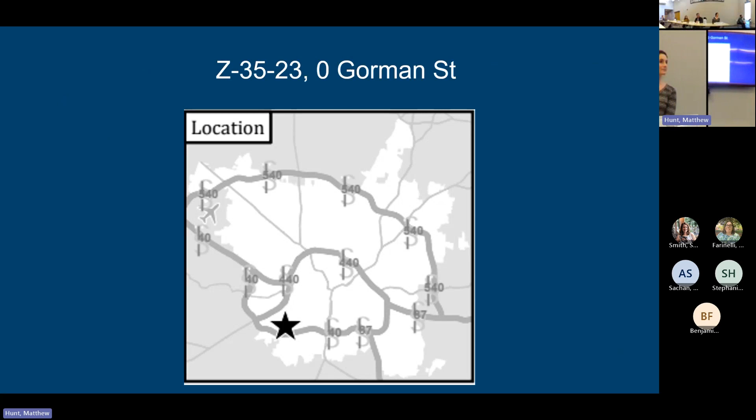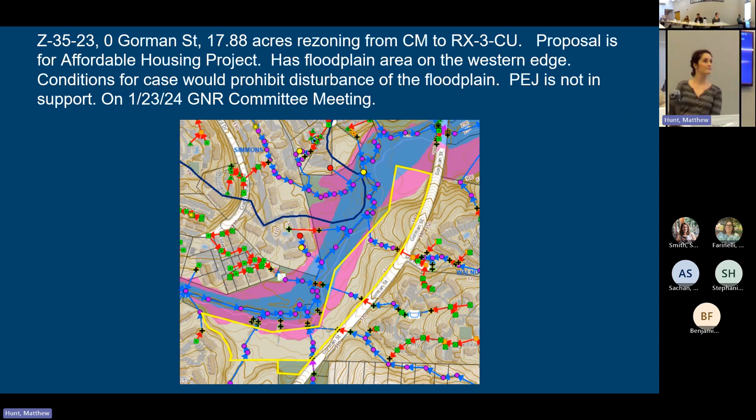But just as a reminder, the Gorman Street one is this rezoning here on Gorman Street, sort of behind that Food Lion Shopping Center, South of Avent Ferry Road. And they are on track for it to be discussed at the January 23rd Growth and Natural Resources Council Committee meeting. And if you recall from the December meeting, they have put conditions down to stay out of the floodplain, but there's still concerns about putting housing this close to the floodplain. And PEJ, the Partners for Environmental Justice, have come out against it, but I don't know if that has changed, if there's been discussions with them and the applicant. So that's the same schedule as we had in December.

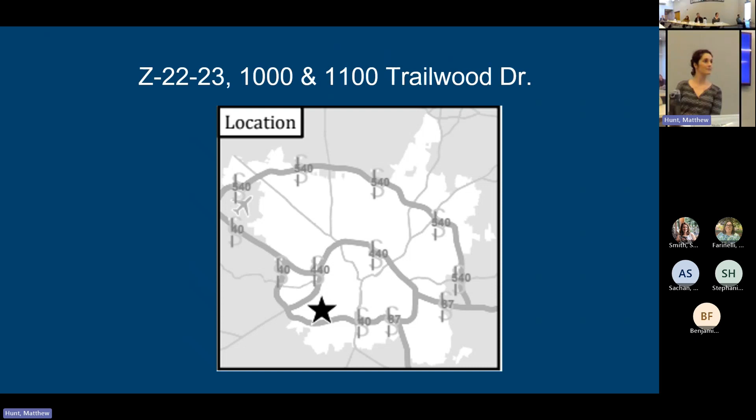The second one at the council table was at 1000 and 1100 Trailwood Drive, which is pretty much a couple blocks away from that one we just talked about, up Avent Ferry Road to the north there, and Trailwood is going north-south. This is the one where they were staying out of the majority of the floodplain, and they were going to go through the code allowances to disturb the floodplain with no impact to the flood levels in Walnut Creek. That's kind of their goal, and they've been discussing with Councilor Harrison a lot this past few days, as Wayne and I have been copied on emails for that.

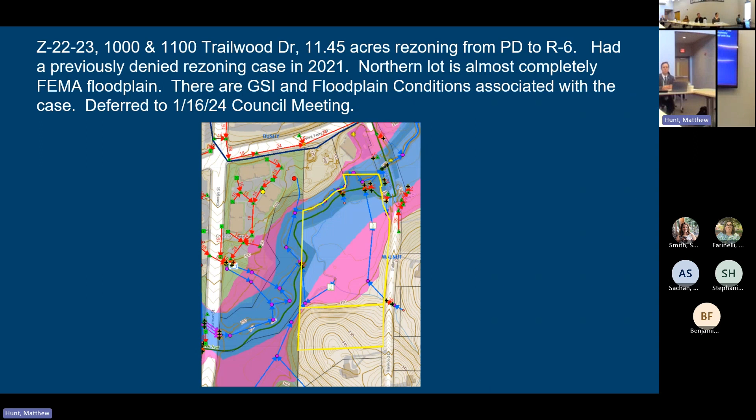As far as conditions, they do have a GSI condition as well for this site, and that'll actually be discussed at the January 16th council meeting, which was the same schedule we had in December. So that's not going to a committee meeting, but going to a council meeting in less than 2 weeks.

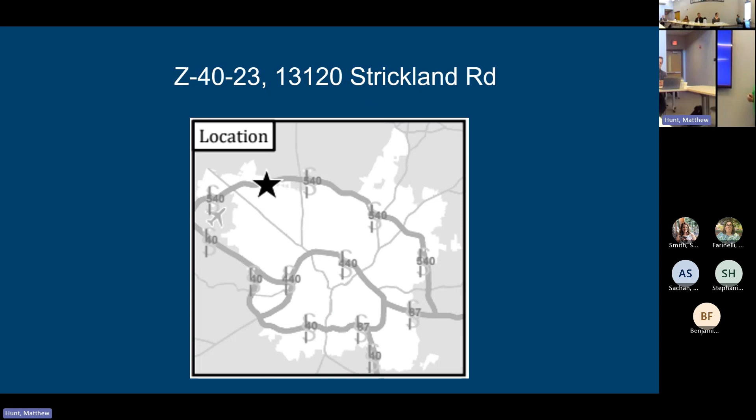And then the only schedule change was the one for Falls Lake that was on Strickland Road. This was the area behind the shopping center off of Strickland and Leesville Road. This went to Planning Commission in December after the SMAC meeting, but it immediately got referred to the Planning Commission Committee of the Whole, which usually meets on the fourth Thursday of every month. And I took that language off our website because they have not set the exact meeting time as of yet. So that should be on that January fourth Thursday agenda of the Planning Commission Committee of the Whole.

That's really a scheduling update there. So the Planning Commission didn't even discuss it at their December meeting. They just automatically referred it. So I assume there'll be robust discussion.

Any questions? I remember in December you made some comments because you were very familiar with this project. Do you have any follow-up? I know you're saying there's some erosion, I think, on the southern end.

I haven't been out there again since my initial site visit with some of the locals in the neighborhood who were concerned. I was out there with Councilwoman Harrison as well, and we did know there was a lot of really visible scouring and erosion that looked like it's coming off of the next door shopping mart. So we noted there are already some stormwater considerations on site, and we're thinking about cumulative impacts for adding more impervious surface there.

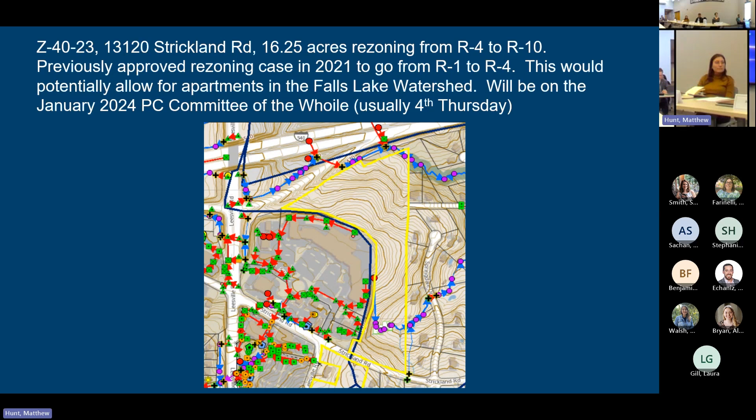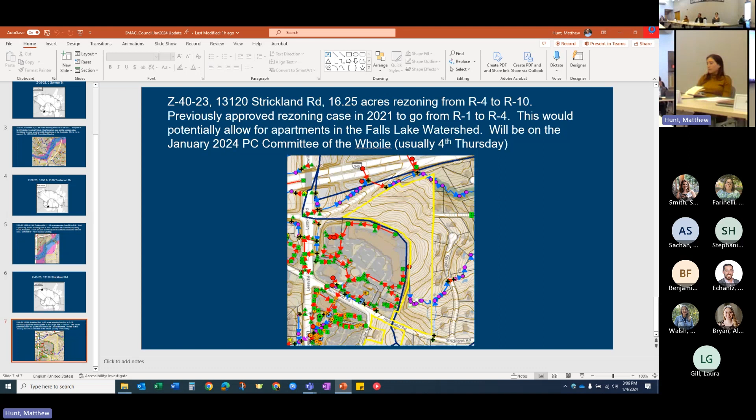I do have a couple of staff report updates on folks who have joined the stormwater team recently. First, I'd like to introduce Tonka Wilkins, who is here today as our new administrative support supervisor in the business services unit. Tonka comes to us from Raleigh Water Public Utilities.

She brings over 15 years of customer service and significant supervisory experience. In Raleigh Water, Tonka worked as the customer service supervisor, managing the customer service unit and providing essential customer service. In her new role with Raleigh Stormwater, she will supervise the administrative support team, oversee administrative support operations, and provide administrative support to the division and to SMAC as well. So welcome.

Also here today, another new member of the Stormwater team, Ross Keith, has joined the plan review team as a senior engineer. Ross has a master's degree in environmental physics and started his career as a stormwater operations manager, in charge of designing, operating, and managing all aspects related to the movement of stormwater for a special taxing district in South Florida. They really have some stormwater issues in South Florida, I know.

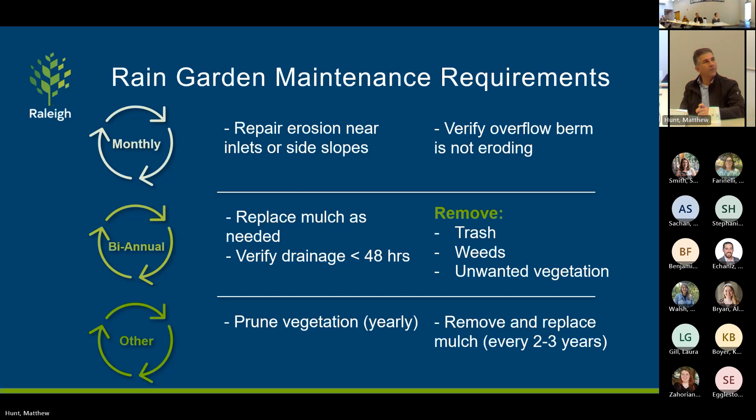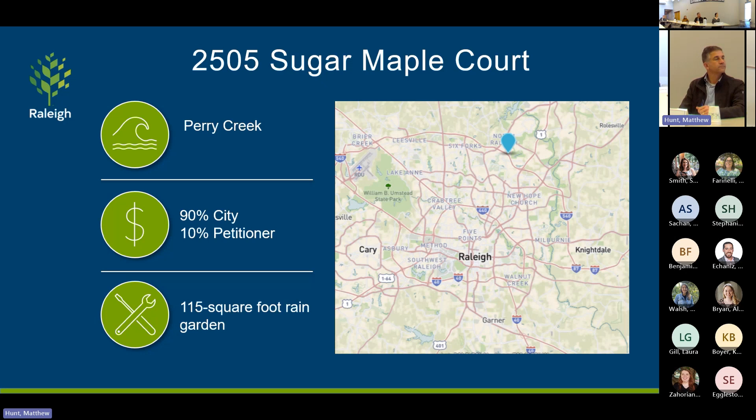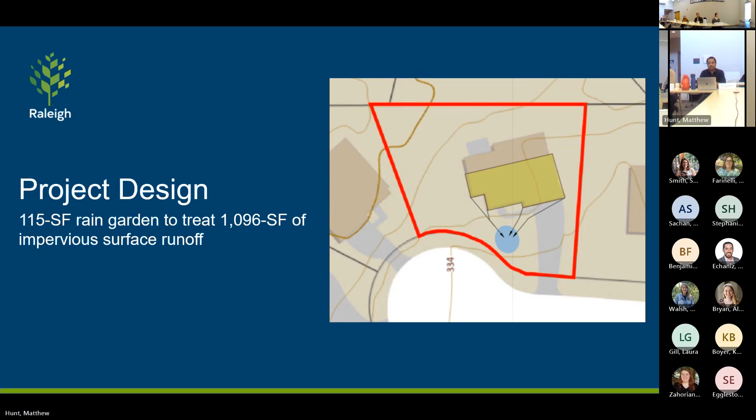First one is 2505 Sugar Maple Court, located in Perry Creek, and it's 90% eligible for reimbursement. It's a 115 square foot rain garden. Basic project design is it captures the front portion of their house, treating approximately 1,096 square feet of impervious surface. Here's a general location of where it's going to be located. They also agreed to put up a sign to emphasize this program. The two photos to the left show where the downspout is going, and the bottom left shows a former pathway of their drainage going right into our right of way. They put up some cinder block to dissipate that. So instead of the erosion and scouring problem happening at their property, it's going to go to a rain garden, which I think will help both their goals and our goals.

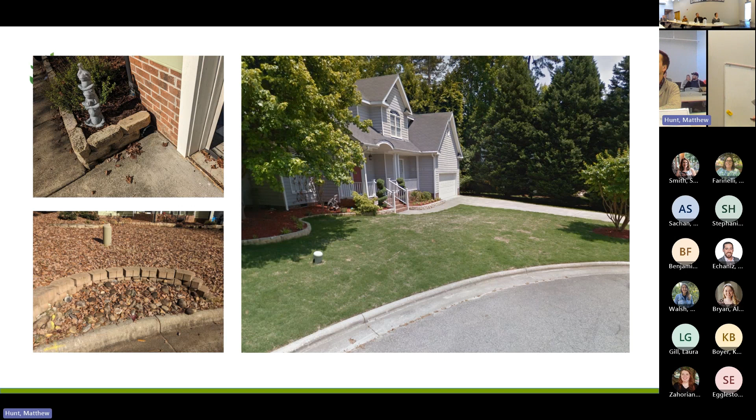Any questions with Sugar Maple Court? Any questions, we'll do these individually. Yeah, no problem. Yes, just to read it right there.

Currently dumping into the right of way, they had some various problems. They're going to do a rain garden on their property, fully within their property. In an extreme storm condition, it's going to improve the day-to-day work. These rain gardens are designed for 1 inch of rain, that's their design scale. So anything past 1 inch of rain, if designed perfectly, will overtop or overspill into the right of ways.

I did the math kind of quickly with these, I know 66K left, it's around 30K. That's correct, and that's a great point. With this program, with the main CIP budget, not the ARPA 100% eligibility, we're looking around $66,000. And after this, if all are approved, we're looking around 33,000 roughly. But we do have the option to take up to 50K, I believe it is, through an administrative action to cover costs in the interim until July, when that new budget will take effect.

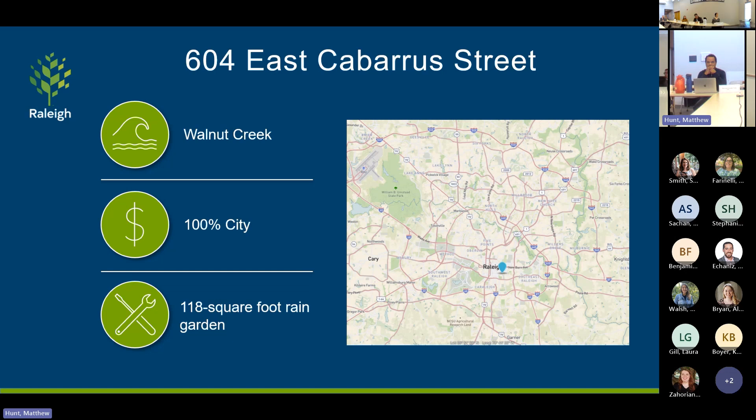All right, next one is 604 East Cabarrus Street, in Walnut Creek. This is the 100% eligibility project. Another small rain garden at 118 square feet. It's actually 2 rain gardens, one located in the back and one in the front. As you can see in the design, one's kind of a linear feature along their driveway, and one is in the top left of their property in the back of the house, but for a total of 118 square feet.

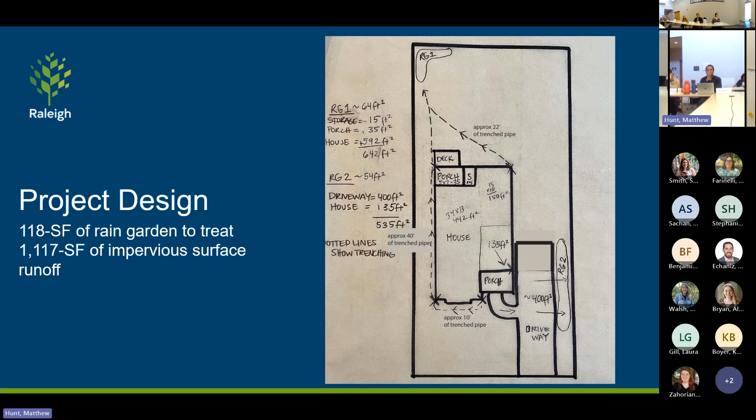These projects basically show the locations of the rain garden. The one on the left is in the top left. This is kind of a sideways photo, I apologize, but it's a photo of where the linear type feature will occur. We did speak to them about having an additional defined berm to stop any sort of flow from the neighbor's driveway.

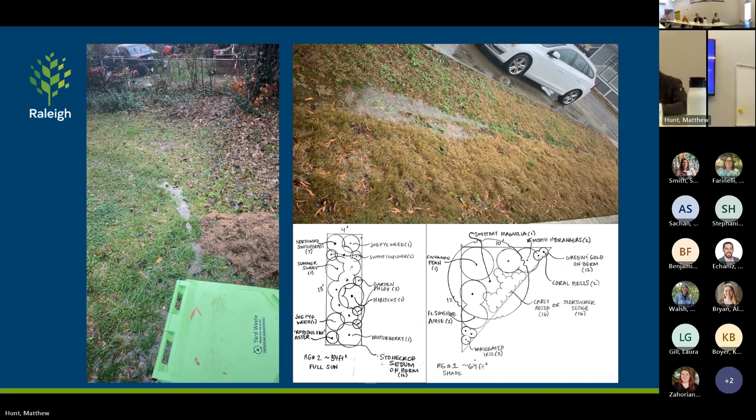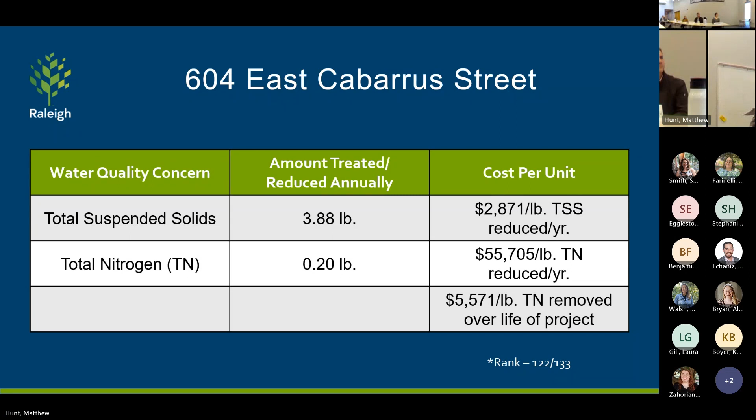Any questions with East Cabarrus Street? No, it complicates things a lot, but having the berm in between the driveway—is there any consideration of maybe them joining forces? Yeah, we often explore that or at least communicate that with property owners. It is complicated because of the legal agreement, and to be honest, I tend to lean away from it when talking with homeowners.

Justin might be able to speak to it. I know there's been a few instances of projects where two property owners have gone in with the same legal agreement. We have the method to do that, but it's not typical, and like I said, we tend to stay away from it just because of these recurring maintenance requirements and tracking people down—it's already complicated enough.

Any other questions? Motion to approve. Luann, there's a second. Josh, all in favor? Very good, all right, appreciate it.

Next up is 1000 Ravenwood Drive, located in the Simmons Branch, kind of the west end of town. This is the 75% zone. This is a 200 square foot rain garden.

Project design, once again, 200 square feet to treat roughly 2,072 square feet of rooftop. This project was another good example of renegotiating because their original design was sloped downhill. You can see the contour lines, and we asked them to try to identify or place this rain garden more on the flatter portion of their front yard.

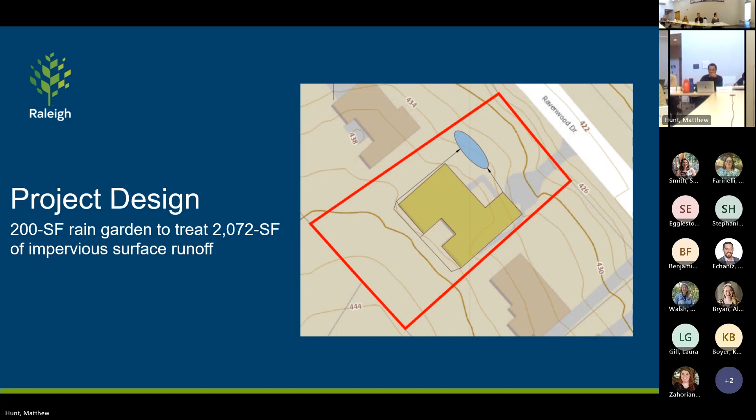As you can see, this is roughly where the location of the rain garden will be. It will be more on this flat end right there versus trying to build up the back end or downslope end as their original design had.

But great feature, once again, very public. And all of these designs agreed to put our signage in. So it's a good promotional, this whole round of projects are good promotional rain gardens.

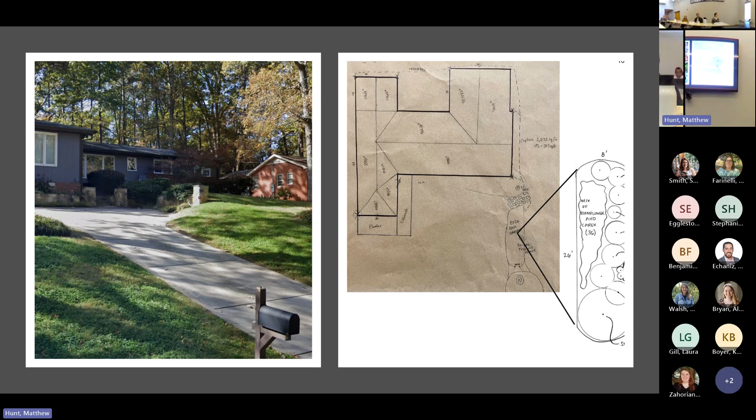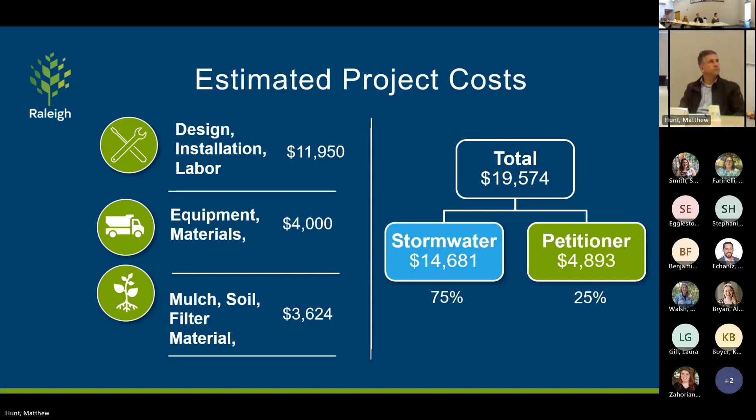Here's the cost breakdown: 19,574, 75% is 14,681. Once again, cost to the left based off the estimate that was submitted. Here are the breakdown of costs versus pollutant removal rates. Once again, very similar to the others, but much higher total suspended solids because of the design.

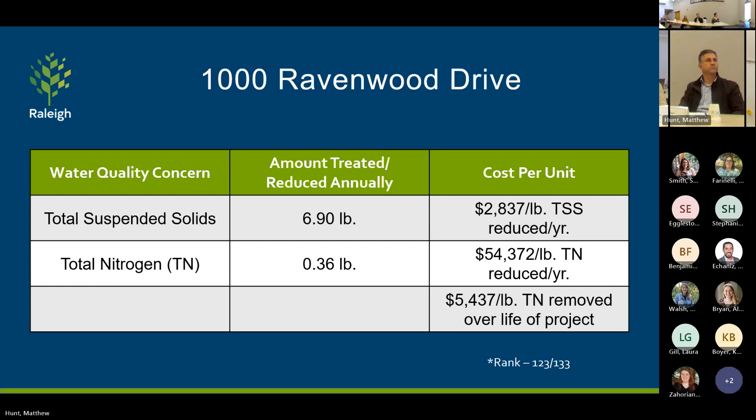Any questions with Ravenwood? Just a random technical question—what about the design makes it so much better with the TSS? Well, I mean, a lot of it, I think, is the drainage area that's going to it. So you calculate that.

There's smaller gardens. But I do believe the simple method doesn't necessarily take into account land type. I think it's all based off impervious surface—land type being impervious or non-impervious versus something like gravel. So it's a basic size-based calculation. Yeah, and that's my best estimate. I'm not a professional on the planning side, but...

Yeah, no problem. Motion to approve. Samantha, second. Sarah, all in favor? Thank you. All right, appreciate it.

Last one here, 4516 Oak Park Road, Northwest Raleigh. It's located in the large Crabtree Creek on the northwest end of it. 75% zoned, another 200 square foot.

This one captures both their rooftop and their overhead, excuse me, their covered deck patio. It's a rain garden located in the front of their house.

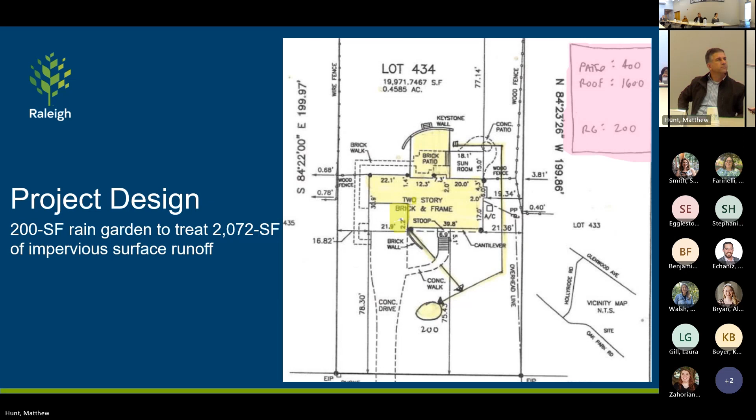As this photo roughly gives the location of where the rain garden will be, away from those trees. A lot of these photos are identifying downspouts and general areas of their house that will be piped. It will be capturing the patio, based off a small catchment that everything flows to. It's hard to see with that photo, but it's to the bottom left of that photo and then piped towards the front.

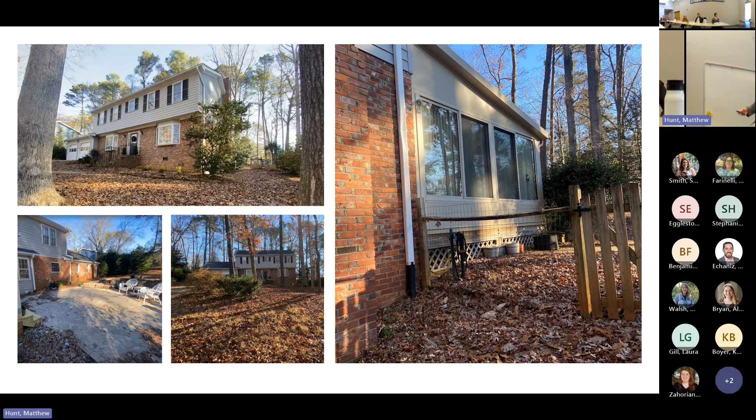Once again, this is another one that's very public, right against the street. We highly encourage them to put signage out. So we're pretty excited about that.

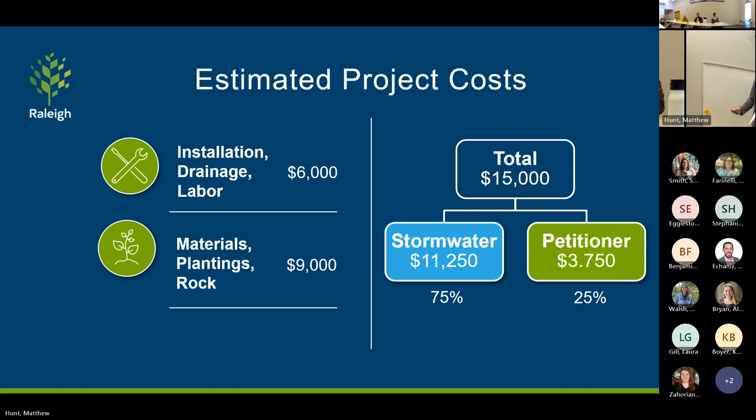Here are the estimated costs based off their estimate: $15,000, 75% is $11,250. Here are the cost breakdowns again. It's very similar to the other one, as far as the total suspended solids.

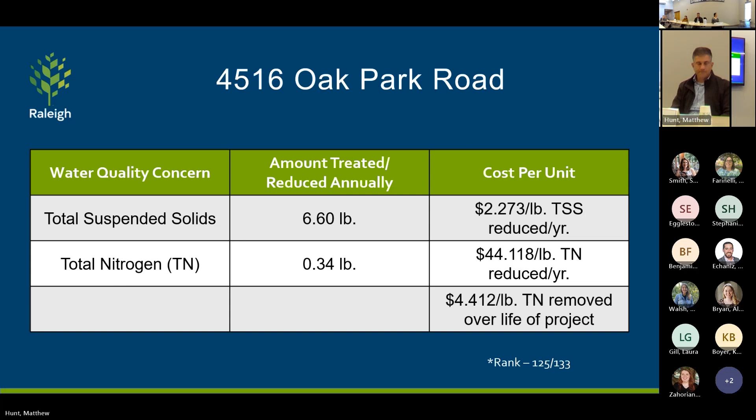All right, last one. Any questions with Oak Park? We have a motion to approve. Carol, second. Elaine, all in favor? Very good. Thanks so much, Steve. All right, you're welcome. Appreciate it.

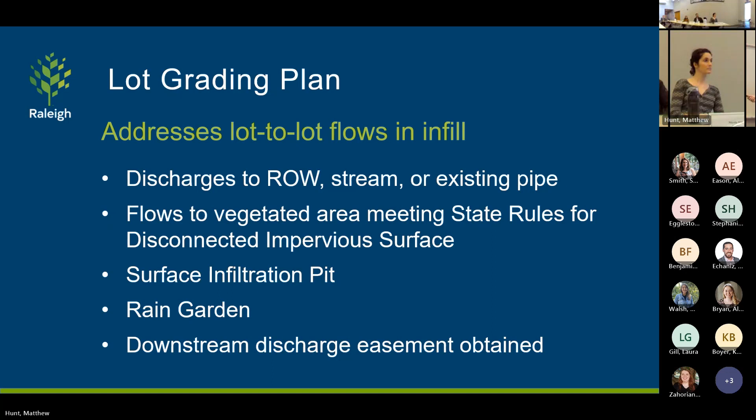So lot grading plan is one of the big four. I'm going to get to the other three in a minute. We've had the largest number of changes incurred in chapter 4, which is about conveyance design.

We've been refining where exactly the transition from publicly maintained to privately maintained pipe occurs. That refinement is reflected in this chapter. So basically, if it's in the right of way, and there's a little exception for small pipes, but if it's 15 inches and bigger and it's in the right of way, it has to meet the right of way roadway standards.

There's a lot of updates related to the specifications for how concrete and plastic pipe have to be certified, how they have to be joined. We've been getting feedback from the American Concrete Pipe Association, which is an industry group. We've also been getting comments from ADS, which is a manufacturer of plastic pipe. So the concrete and the plastic pipe people have been weighing in on this and keeping each other in check because they have competing business interests. But we will accept their technical knowledge any day.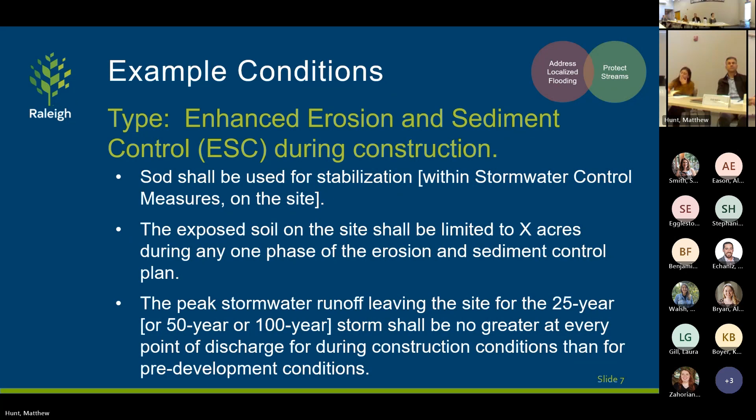All right, so the next type of condition I'm going to talk about would address localized flooding. So not things that are coming from, say, the main stem of Crabtree or Walnut Creek, but more neighborhood issues, which would be to offer additional discharge controls. So currently, the city requires control of the 2 and 10-year storms for all the development sites that don't get the exception for being under an acre or under a half acre. And we have seen sites offer to provide controls for the 25-year.

The UDO language in terms of at every point, though we have seen people offer, if there was flooding concerns in one direction off their site, we've seen it offer a 25-year control for the flow to the north and not for the flow to the south.

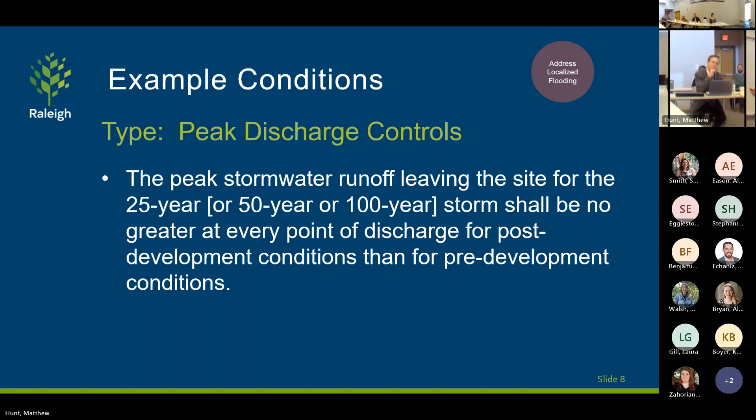Then the next category is additional water quality treatment, and these potential conditions really get at instances where a site might not have to provide on-site controls or might have to provide limited controls. So this first one, actually, we don't require existing impervious area to be treated, but that could be offered as a rezoning condition that the site could say, well, we're going to treat 50% of our existing impervious area, which would be above and beyond what is in the UDO.

The second one, this is where your mileage may vary, is a little Byzantine, but basically what it boils down to is that right now our UDO says if the percent impervious on the site is going to be more than 24%, they have to provide an on-site SCM. But if it's say only 20%, they don't have to provide an on-site SCM. They can do nutrient buy down only. And so a project could offer to provide on-site controls, which would help Raleigh streams rather than the nutrient offsets going on somewhere else in the watershed.

Make one comment on that one too. Just the first bullet for clarification. The city is not legally allowed to require treatment of existing impervious area. But as part of the rezoning process, should the developer offer that voluntarily, then it would be enforceable just as if it were a requirement. So that's one that can provide a lot of benefit for a redevelopment site that has the existing impervious area on it.

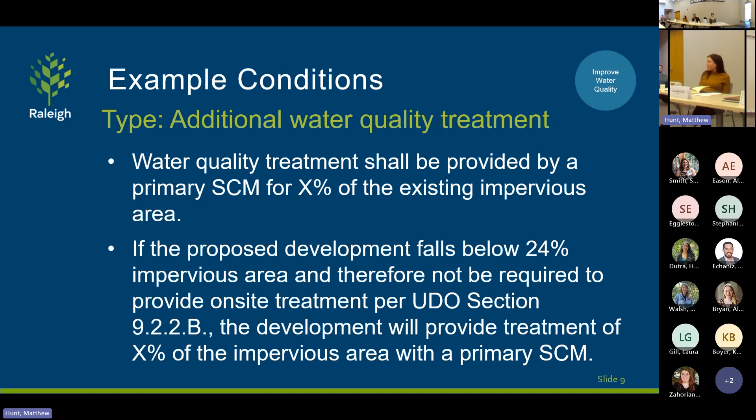All right, the next one, we're getting to where we started, which is green stormwater infrastructure treatment. So I just want to highlight how many desired outcomes this meets. This could address some localized nuisance type flooding. It meets the goal of implementing GSI. It can protect streams and improve water quality.

So we put a fair amount of thought into how to write these, because we have seen previous conditions where, as I mentioned, we'll install 3 GSI devices. We've also seen we'll install 2,000 square feet of permeable pavement, which is quantifiable, but doesn't get to how much of this site is being treated. Is this a drop in the bucket? Is this a meaty commitment? It doesn't really get to that. So we're actually recommending that it be based on a percentage, because that can be understood of, hey, they're committing to this percentage

doing this further treatment. So this first one is written so a site would have to do water quality treatment, and they're saying this percentage of my water quality treatment on site will be done with green stormwater infrastructure. So that might be instead of an underground practice, or instead of a wet pond. Because we've specifically said through a volume control measure, that would be through infiltration or rainwater harvesting. And it would get the multiple benefits from green stormwater infrastructure, like habitat and addressing urban heat islands and all the auxiliary benefits.

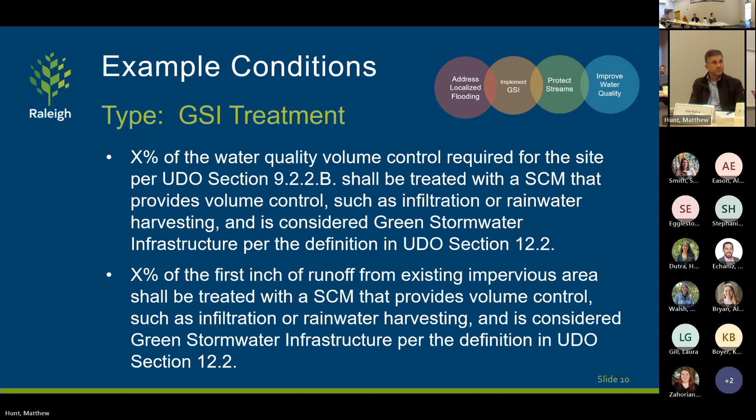The next one is to increase stream buffers, and this is something we've seen offered previously, on specific streams or on all streams on the site. This top one just basically says you would extend the width of the buffer, but one of the problems with doing that is that it wouldn't necessarily say what uses are allowed. So I really prefer this second one, which speaks to how it would be treated in reference to the buffer rules, which, in this example, I've said zone 1, the more restrictive of the two zones. So in zone 1, if there's existing forested area, you can't remove the forest.

But it's important when somebody offers a condition that we know whether it would be treated like zone 1 or zone 2, where you could actually do grading. It has to remain vegetated, but it could be lawn or landscape. Do you give a list of sample conditions to the applicants, or do they bring the condition to you and then you wordsmith it back? Well, that is why we are presenting this to you, to get a list into the public realm. We do not have a handout for applicants, but the idea is that we could refer applicants to the meeting materials for examples.

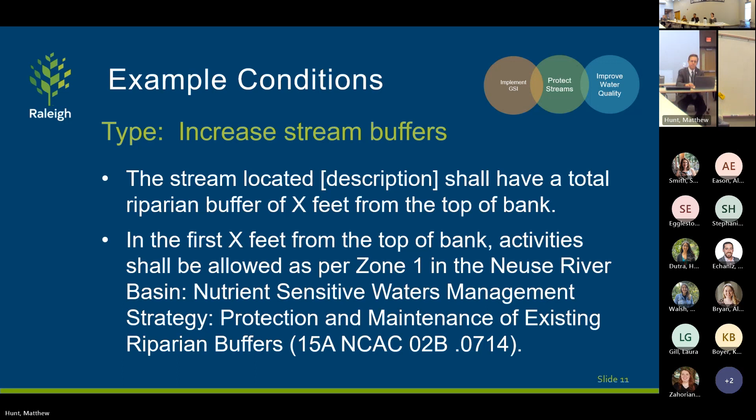All right, I've got two more. They're both related to floodplains, so preserving floodplains is one of the outcomes. This gets to the broad idea of implementing green stormwater infrastructure and building our natural systems.

So some examples would be to commit to limits of disturbance that would not encroach into the floodplain area. One that might be more realistic for a broader number of projects is to not alter existing grades in the floodplain, because that would allow a project to install a sewer line but restore to existing grade.

There could be no built-upon area in the floodplain. For example, of the cases Ben talked about, Gorman Street is more like the second bullet, where they're saying they won't do any fill or build anything vertical in the floodplain. Trailwood is more like this last one, where they are planning to do some fill, but they're doing a study to show there'll be no rise in flood elevations, and they're not pursuing a letter of map revision, which is a FEMA process to change the regulatory floodplain elevations.

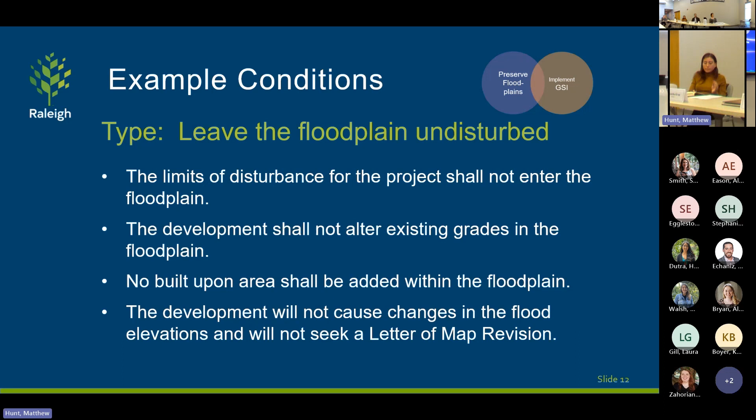Then we have some others — this gets to what Ben was saying — these would mostly apply to things upstream of the FEMA floodplain, delineated by processes other than FEMA studies, or to previously developed lots in the FEMA floodplain, where we allow 50% of the footprint to be covered with something, whether it's a building or otherwise.

So an applicant could commit to limiting the fill placed on the lot, or limiting the total disturbance even if they're not proposing fill. They could say, we're not going to encroach on more than 10% of the floodplain on this lot.

Any other questions or comments about the floodplain topic?

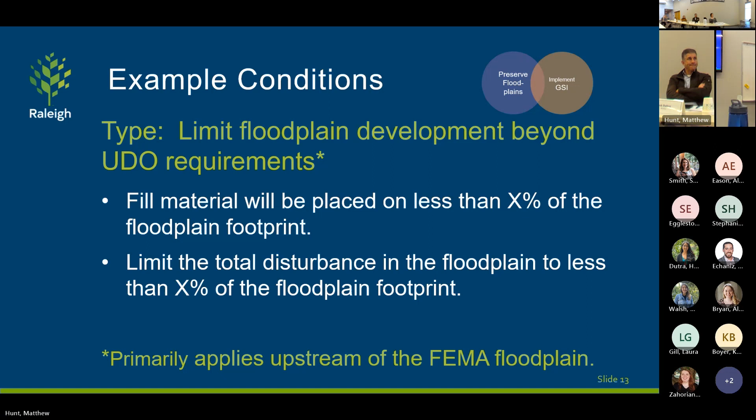All right, so really we've been doing this as we went, which is to discuss and bring forward any recommendations or changes that this group has. I would propose that we make the changes discussed today and put them in the packet for your next meeting.

Good. I just want to say thank you — I think this is going to be a really helpful tool for the public, but also for our decision makers who are trying to decide on some of these more difficult projects and what would make them a little more approvable. This is going to be a really helpful tool, so thank you.